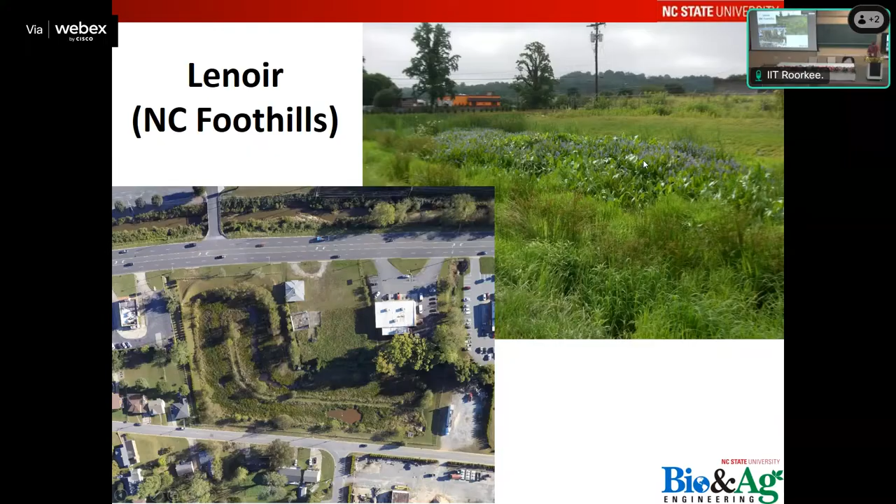Oh, this is a pretty cool picture, taken from the air. You can see this looks like it's a forebay. It's actually not, the forebay is in here, it's already sedimented in. But you can see how the water flows across. There it is up close. That's pretty cool, this is up in our mountains.

It's a small scale wetland, but it works up in the mountains. You may have a spot that makes sense like this, something small. This is a larger one where it's flat, water table's up near the surface.

Oh, this is another pretty cool one. It's got two inlets, this one right here, and there is an inlet that's hidden by this tree, but there's also an inlet here.

And you can see how the water snakes around in the wetland before it leaves. All right, that's a pretty large practice, about 8 hectares of stormwater wetlands, not far, Sean, from your old house.

And this is what it looked like when it was 2 years old. You can see the walkways in here. It's what it looked like 4 years later. Things are growing up, you still see a lot of different types of species in here.

2, 6, okay. Wetlands do go through succession.

How many of you have designed something already in your young careers? You designed something and you've seen it get built. Well, it is one of the very special things. This is my very first project, all right?

So it's very special to me. You see, in 1998, it got installed.

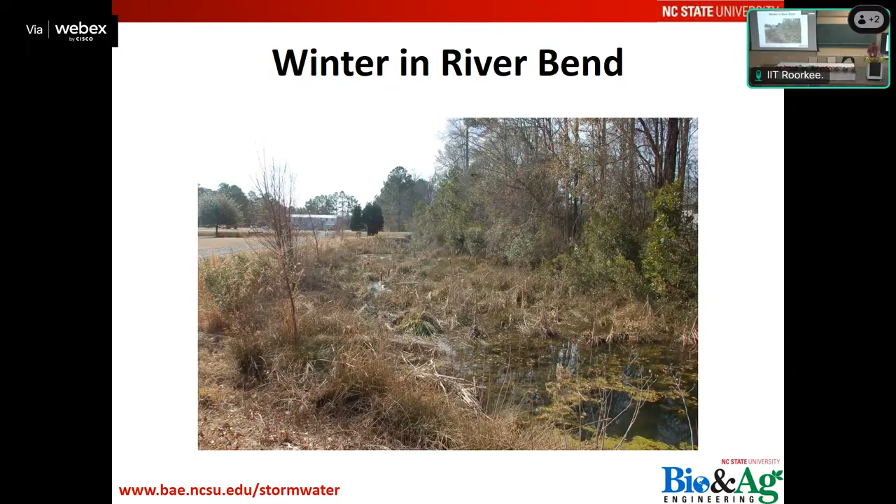Take a look at that one again. Boom, boom.

Here's a step pool system. If you're on a slope, the wetlands are basically wetland cells that cascade down to one another. So if you have a sloped area, you can make constructed wetlands if you wanted.

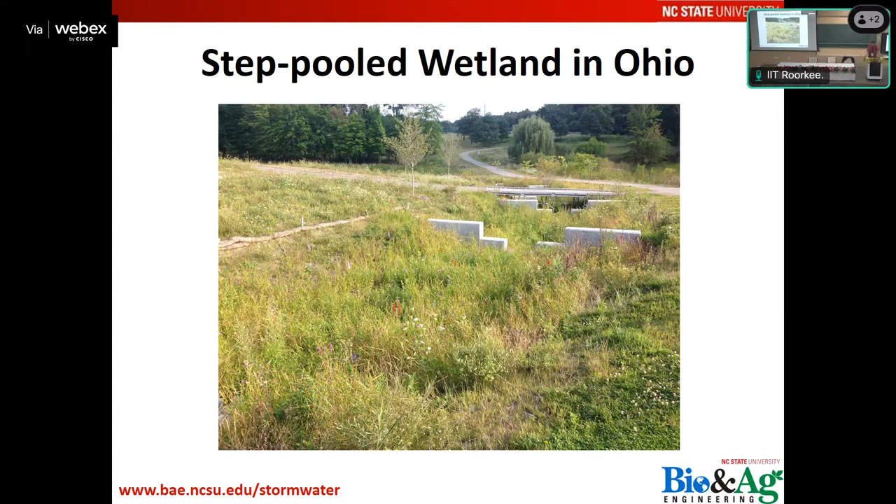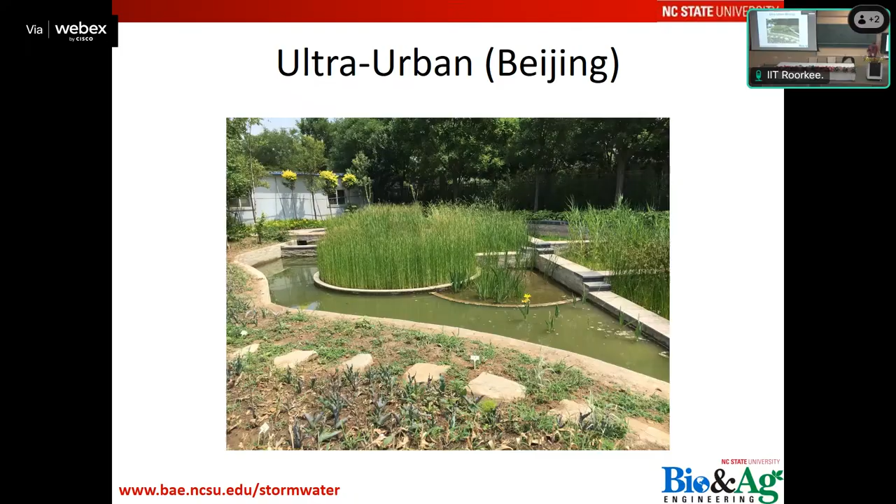All right, here is an ultra urban one in Beijing, where they have certain plant species dedicated to certain geometric features inside the wetland. All right, here's one in Cali.

We talked about the Terminator earlier. When was that? Was that on Monday? We talked about the Terminator. Well, here it is. And what they're doing here is it doesn't rain in California, it's a lot like here.

It doesn't rain for about 8 months, and then for about 4 months it does rain. Except the difference between the 4 months it rains here and the 4 months it rains in California is

that you get a lot more rain here in your 4 months than California gets in its 4 months. Probably about 5 times more. Okay, California is pretty dry, but you still see flow going on.

Where do you think that flow's coming from? Why is there water in this channel when it probably hasn't rained in 4 to 5 months? You guys want to guess?

Yes, there is some discharge, illicit discharge, a little bit of illicit discharge occurring. So there may be some wastewater in that flow. There's two other sources.

You guys ever know that air conditioning produces condensate? If you have an air conditioning device, it produces condensate. Southern California, there's a lot of people. Everybody has air conditioning. All right. So there's actually air conditioning condensate in there. And the American dream, for some reason, involves grass.

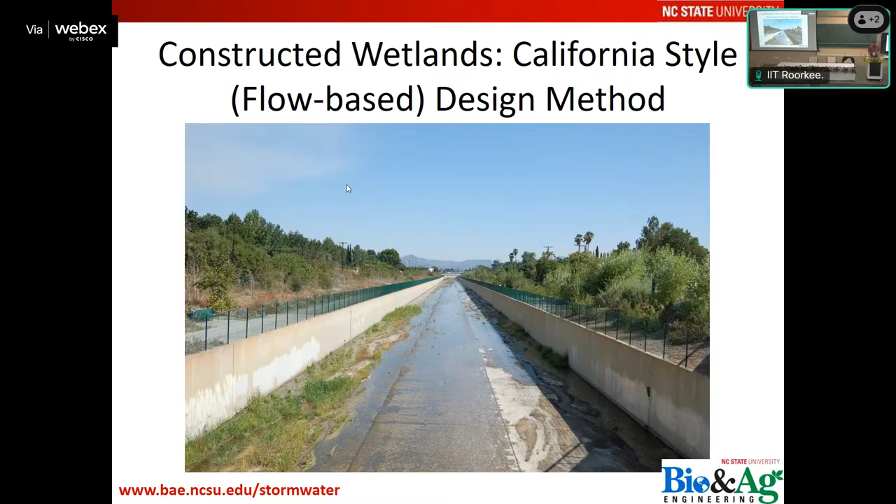But is it a high flow rate? Not particularly, right? And so if you could actually capture this water and send it to a wetland, you could have a significant improvement on pollutant load being discharged, in this case, to the Pacific Ocean. All right? And so what they've done in Los Angeles County is they will divert this low flow water into wetlands. See if I can get it to work. Try again. Into wetlands that are located to the side of the channel. All right. There's the space. And then once they've made the fix, there it is.

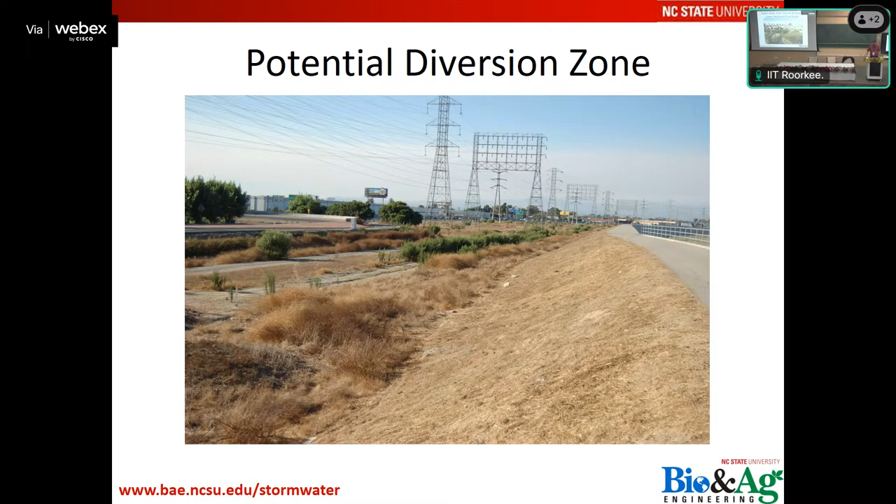So basically they'll divert water from that concrete channel about 1 kilometer upstream. And that's how much fall you have to have. 1 kilometer upstream, and then they'll discharge it here, and then this will flow through a 0.5 kilometer long wetland and get cleaned. All right? So even in places that are semi-arid, or even in times where it's dry, a constructed wetland like this is particularly good at removing pollution.

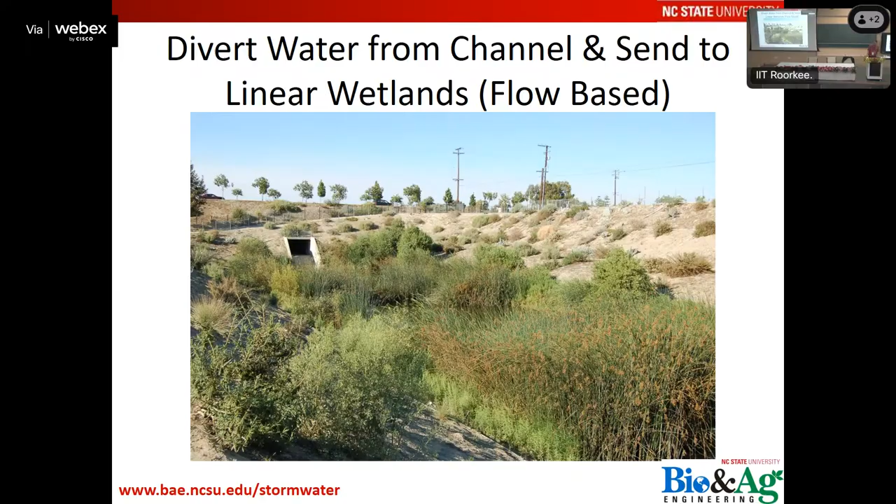Now, I do not know what we're going to see today. All right? But if we see a trickle of water, just remember, a constructed wetland might be very happy with something like that. And we'll discuss in this next lecture, I'll get to it right before we leave today, how to design a wetland based upon flow rate.

We'll come back to why that happens in just a little bit. All right, so where is a good place to put your constructed wetland? Right off the bat, places where the water table is within about 1 meter of the surface. That's a great place to put a constructed wetland, especially when you have enough space and it's flat. Okay? So if the place you're wanting to put your stormwater control measure is flat, and the water table is close to the surface, woo boy, that is Mother Nature telling you that you should be putting a wetland right there, or perhaps a wet pond.

All right? The selection of stormwater control measures is actually not, as we say at home, rocket science. All right? Meaning that, giving homage to rocket scientists, they really should call it rocket engineers because they're the ones that actually build the things. It all is pretty obvious. Like, well, if it's flat, you're near the water table, you're worried about nutrients, and you have enough space, I'm going to put a wetland up. All right. That tends to be how it goes.

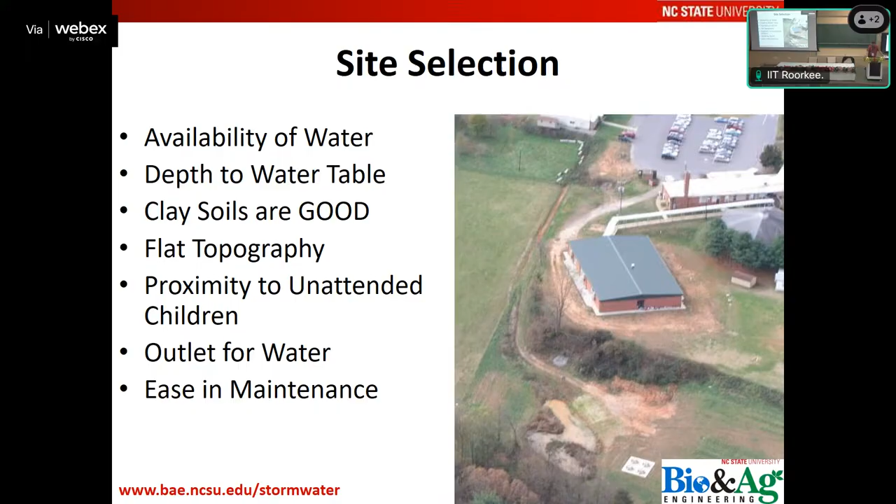So, wetlands, we talked about the pollutant removal mechanisms. This is just a revisit to that very quickly from Tuesday. All right. Wetlands are good at sedimentation, gross filtration, not filtration proper, but gross filtration. They do have adsorption, though the adsorptive sites do eventually fill up. They have plant uptake. They're very good at microbial processes, and you can design wetlands that are particularly good at killing pathogens. You just have to have zones of your wetland dry out.

And so one of the things I mentioned on Tuesday is that if you can identify the pollutants you're concerned about, then I can not only pick a practice that's good at removing those pollutants, but I can adjust the design of my practice so that it's better at removing those pollutants.

So a classic case of if I'm trying to get rid of pathogens is I'll design my wetland to actually be, a lot of the wetland, just a few centimeters above the internal water table, so that in between storms it dries out. It's still a wetland, but it dries out, and therefore pathogens can be killed due to desiccation or drying out. All right. So again, there are things that I can do to my wetland to sort of optimize its pollutant removal performance.

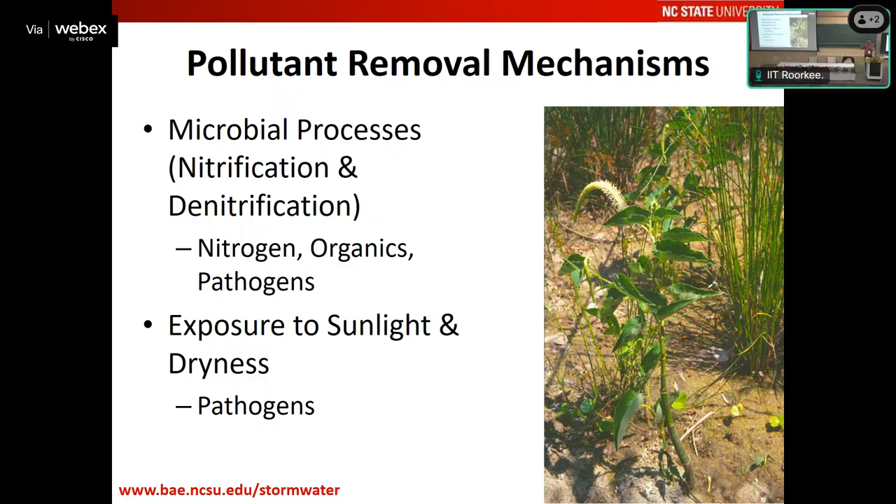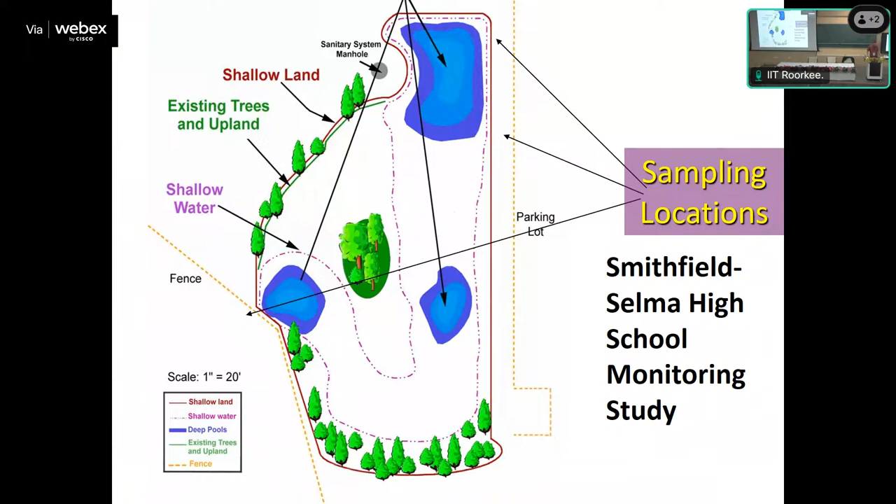All right. So now let's talk briefly about, I'll show you a couple of examples of how well wetlands work. We had a wetland that we studied here, at this school, that's what it looked like where we did the study. So this is the design that the student made. This is what got put in the ground. Not bad. All right. And these are the data. Oh yeah, we collected water from the inlet. We collected water from a chute once we cleaned that up. And we collected water from the outlet structure. All right.

The red bars are your inflow concentrations. And by the way, those are some pretty big numbers. 25 milligrams per liter of nitrogen. That's a big number. That's a big number. There's no other way to put it. All right. And then the blue bars, well, that's what left the wetland.

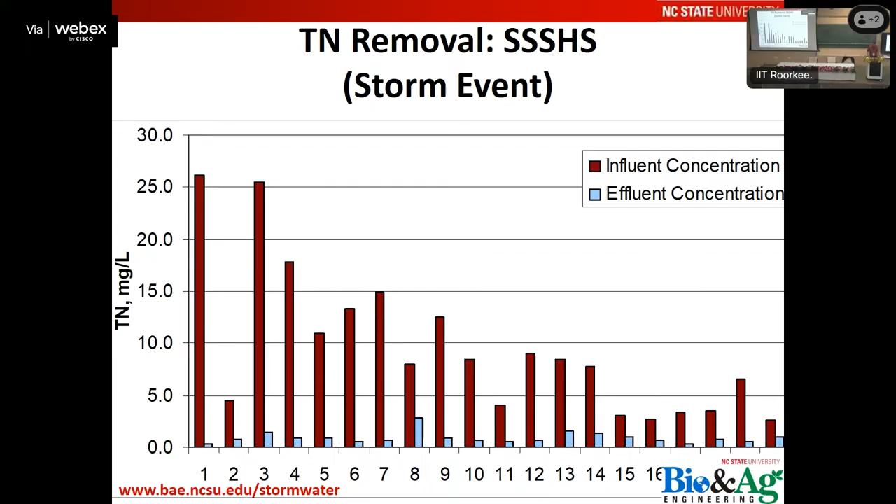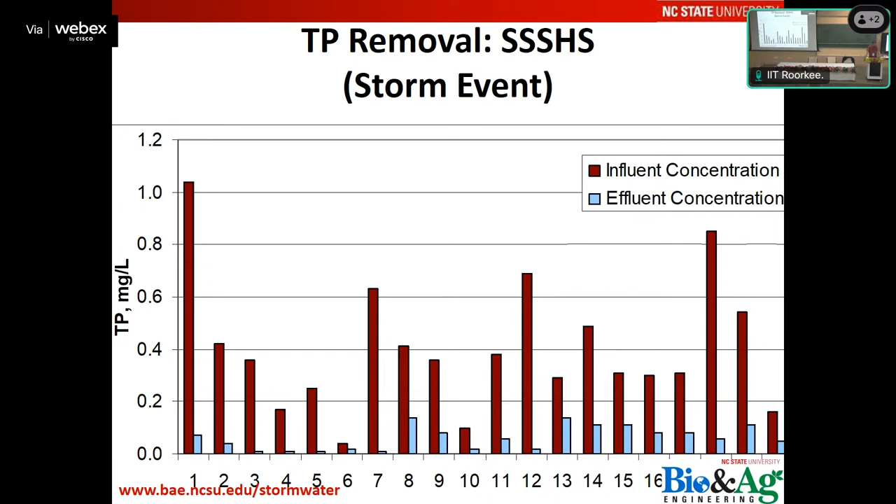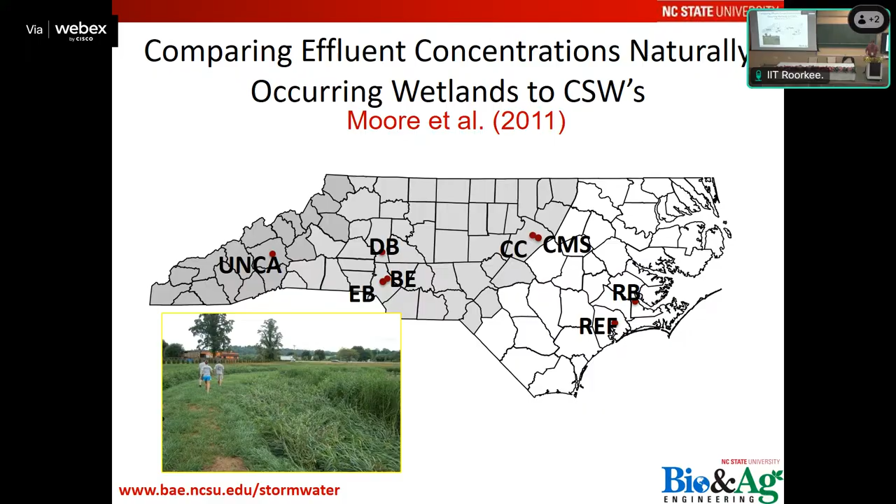All right. And I showed you this on Monday where we compared constructed wetlands to naturally occurring wetlands. And just to remind you that the constructed wetlands worked similarly to the naturally occurring wetland. Not exactly the same, but similarly, except for one. You guys see the one I'm talking about? One of those 7 man-made wetlands or anthropogenic wetlands. Which one was it? The red triangle one? Yeah, it's the red triangle one. Exactly. So you got the red triangle one, like, hey, Bill Hunt, what's up with the wetland represented by the red triangle? Some of you are wondering that.

How many of you guys are pessimists? Any pessimists in the room? How many of you are optimists? Yeah, I'm an optimist too. Engineers, they say, well, I'm a realist. That's fine. You can be a realist. You guys know the difference between the optimist, the pessimist, and the engineer? The optimist, the glass is half full, right? The pessimist, the glass is half empty. The engineer, the glass is twice as big as it needs to be. All right, fine. You can use that joke. I did make it up. I made it right there on the spot. No kidding. I'm sure someone else has made that joke up, but okay. I have to remember that joke for later.

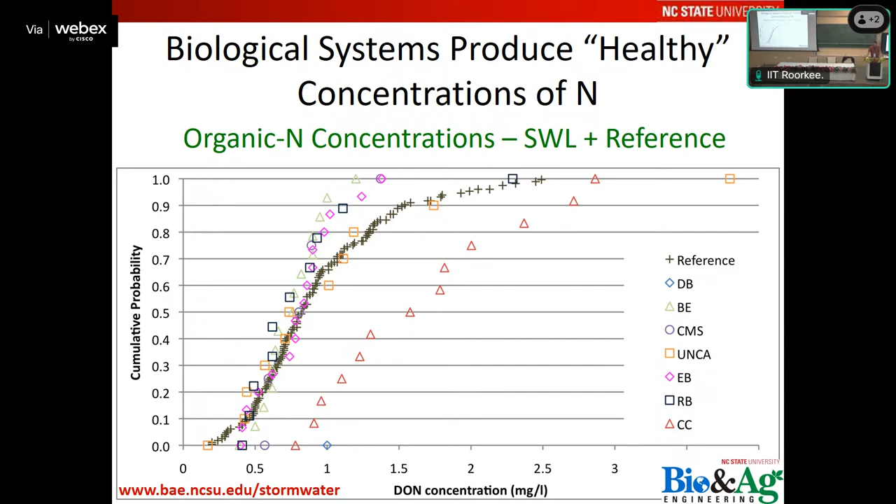And this is something I learned from my agricultural engineering degree that honestly I did not learn from my civil engineering degree. I got my graduate degrees in ag engineering after getting my bachelor's in civil water resources engineering. Y'all see this soil right here? Would you guess that soil is fertile or sterile? Sterile. That's right.

One of the things in ag engineering is they teach you how to grow plants, crops, maize, for example, wheat, soybeans. And you learn about soil fertility as a part of that discipline. In civil engineering, I learned about soils. You know what I learned about soils? I learned how to beat the crap out of them to make them strong enough so you could put a pier for a bridge on it, right? And so there's two different ways of looking at soils. The CE way is so I can build structures on it. The ag engineering way is so that I can grow stuff in it.

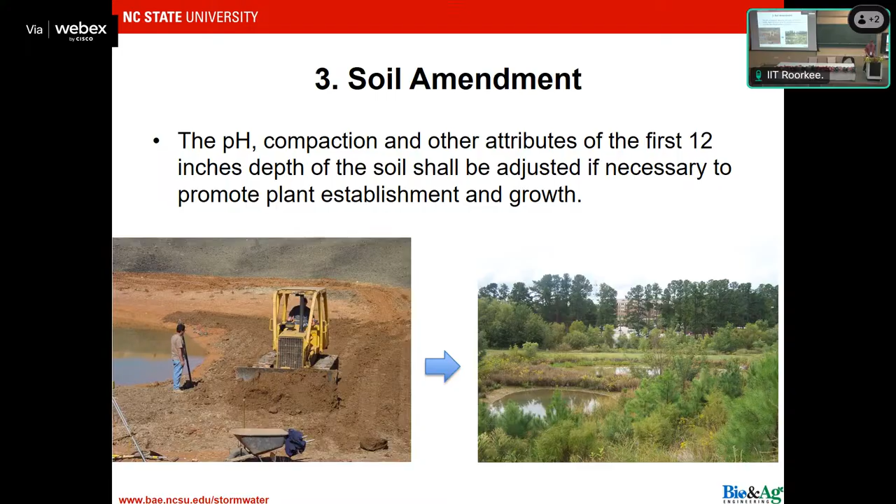And so with a constructed wetland, it's important to amend the soil with something to help promote growth. We have standards, darn it. Don't worry about the 12 inches and all that jazz. Just make sure you amend the soil of the wetland with something organic to promote growth.

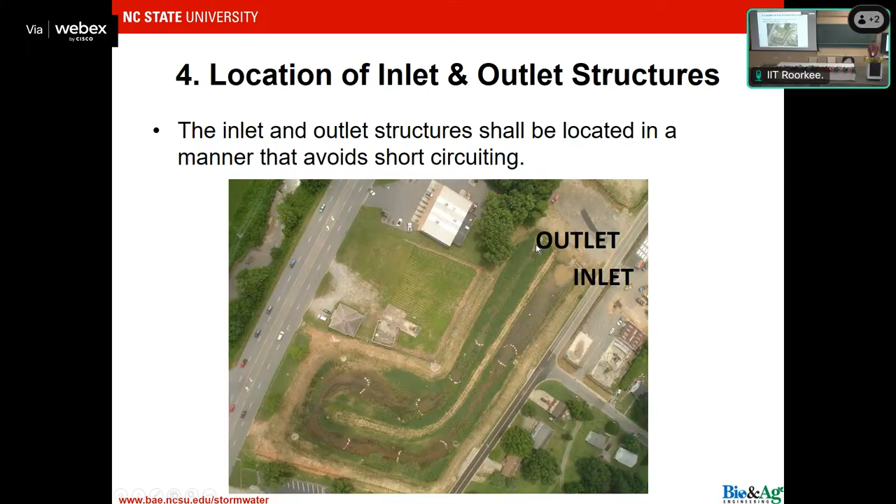Here's a classic case. So I'm just going to move on and hit a couple of things here. Here's an inlet. Here's an outlet. They're right next to each other. Like, ooh, that's a problem. But the reality is the water flows all around this berm before it leaves. So the inlet and outlet are actually extremely far apart. I will show you this wetland a little bit later because we've monitored it, all right? And there's an example of that berm.

Remember I talked about forebays? What do forebays do? Two things. You got them right the first time. I just want to because I'm going to ask you this question tomorrow. This question is going to be on the test without question. Name one thing a forebay does. Okay, I think you got both. It slows the water down and it traps coarse sediment. Slows the water down, takes the velocity, takes energy out, traps coarse sediment. That's what forebays do. You need to have a forebay in a wetland, right?

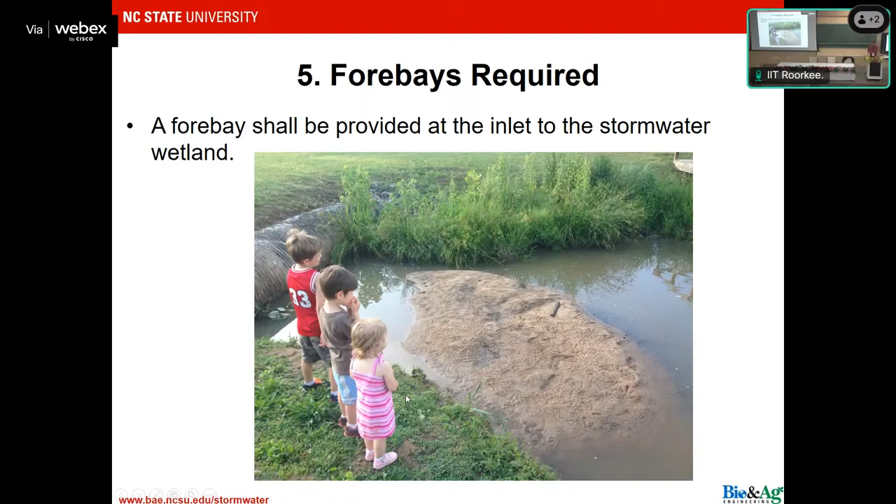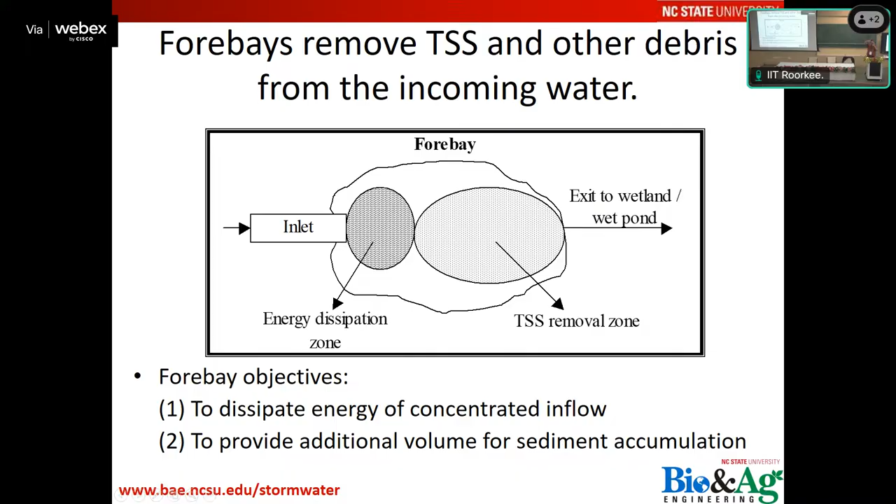And there's future stormwater control measure inspectors right here figuring out what's going on. All right. So here's your energy dissipation zone. Here's your removal zone. So the forebay of the wetland has a part where the energy gets taken out, and then a part where the deposition happens. And it's roughly 15% of the surface area. It says 10 to 15, but we want it typically to be about 15% of the surface area. That's what we found is about the right size in North America, okay?

Based upon our coarse sediment loading and based upon a frequency that we are comfortable with scooping out the sediment. Property owners are okay scooping things out every 5 to 10 years. You may be okay scooping them out every 2 to 5 years. Just be mindful of that. And plus, there does come a point where you can't make the forebay any bigger because you've got to get access to it.

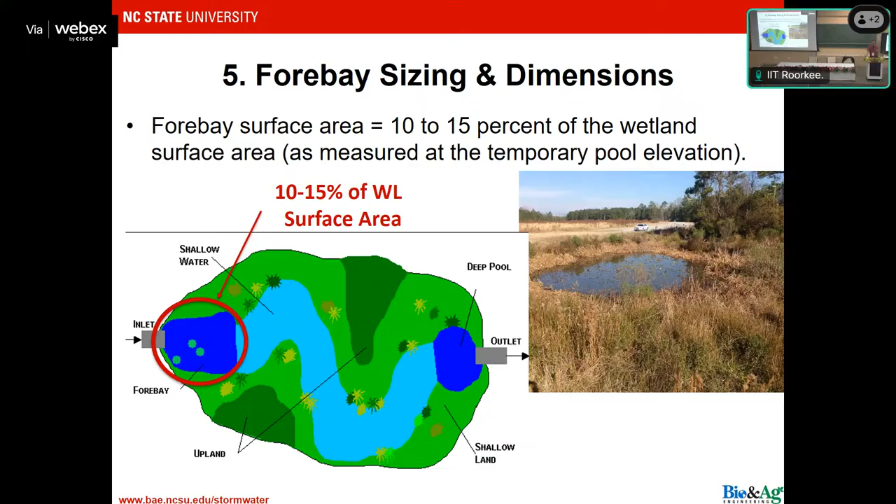I just think if you use a forebay for a wetland or a wet pond in India, based upon what I've seen on my two visits to the country, you're going to have a higher sediment load coming in, which means you'll have to clean it out more frequently. The general idea behind a forebay is it's deeper where water comes in and tapers up to a shallower area. That helps facilitate energy removal and sediment deposition.

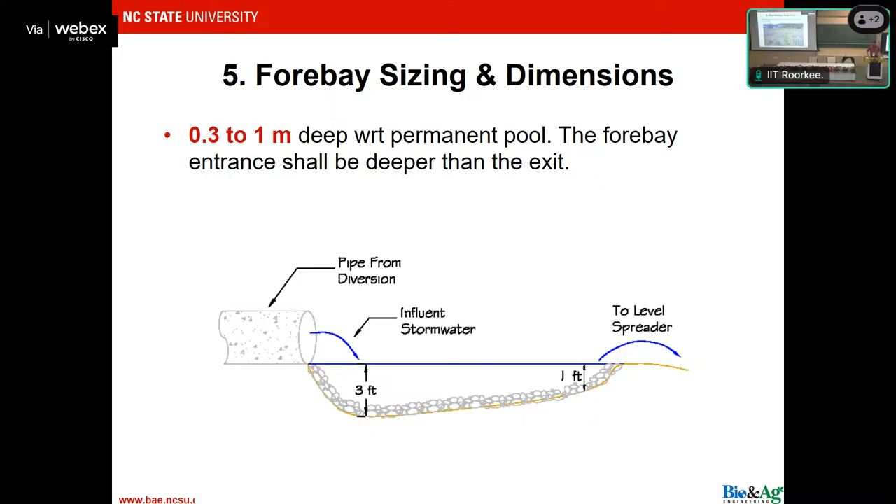Wetlands also have to have areas inside them, besides the forebay, where the water is a little bit deeper. Not a lot deeper—I'll skip the reasoning why due to time, but basically these little pools should be about a half a meter deep. Why do you need pools scattered about a wetland that are a half a meter deep?

What if I told you that critters live in there, insects? What type of insects do you want living in deep pools in the middle of a constructed wetland?

How many of you want mosquitoes living in that? There you go, okay good, we're on board with that. We don't want mosquitoes. So what type of critters do we want in there?

Critters that eat mosquitoes—that's correct. There's also a little fish here, in Asia, that we have in North America too. It's called gambusia. Have you ever heard of gambusia? It's called a mosquito fish because guess what it likes to eat? Mosquitoes. So by putting those deep pools in there, you're giving space for gambusia and other things, insects notably, that like to eat mosquitoes. You're giving them a place to live.

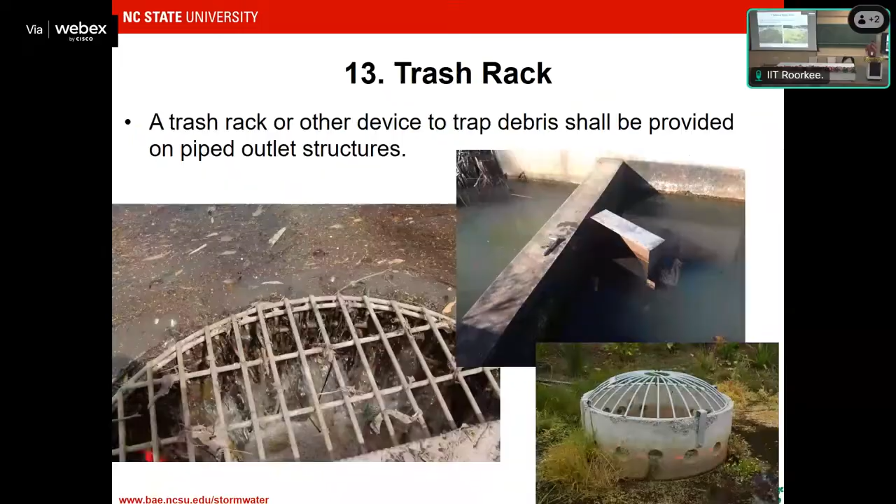I'm going to skip through a couple things. I already told you it was a half a meter deep. All right, trash racks, same story.

There are parts of the wetland—most of the wetland, if you're designing it to remove nitrogen, which is usually our reason to use wetlands—that are about ankle deep water. We call that, very fancy name, the shallow water zone. Does that make sense? What is that?

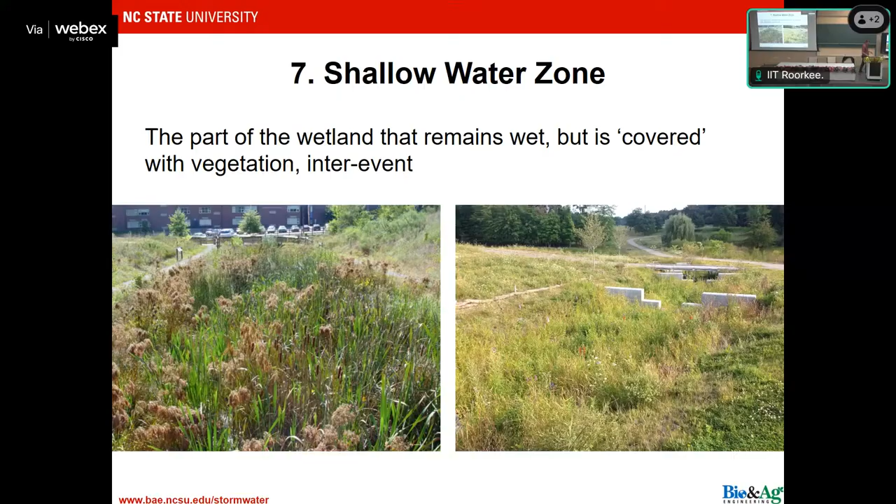About 10 centimeters? The majority of the wetland is 10-ish centimeters deep because that's where the plants you see can grow. They're happy there. And it's in that zone that denitrification is occurring, so that's an important zone in a wetland. Its maximum depth would be 15 centimeters, but its average depth is somewhere between 5 and 10 centimeters.

This is a bit of a challenge with wetlands because you want to make sure you get those depths right. You don't want those depths to be high and dry. So if your orifice elevation is off 5 centimeters too low, a chunk of this is going to be dry and it's not going to do its job of reducing nitrogen. And if your orifice depth is 5 centimeters too high, it's going to be too deep, and you might even struggle with plant growth towards the edge of it.

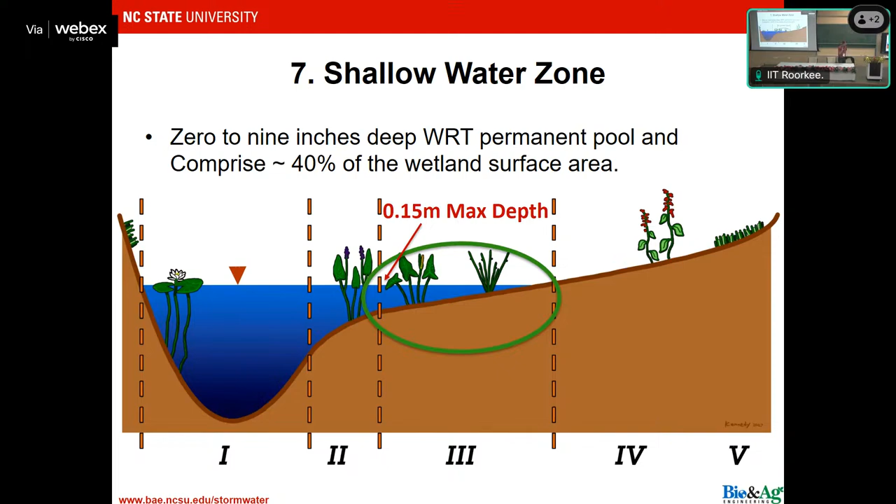Why don't we have this for a pond? Because it really doesn't matter for a pond - you're off by 5 centimeters in a pond, whoop-de-doo. But in the wetland, the grades matter so much for plant growth that you want to be able to get within 5 centimeters, usually 2 or 3 centimeters, of what was planned. I just want to make sure everyone is comfortable with that - it's an important point about constructed wetlands.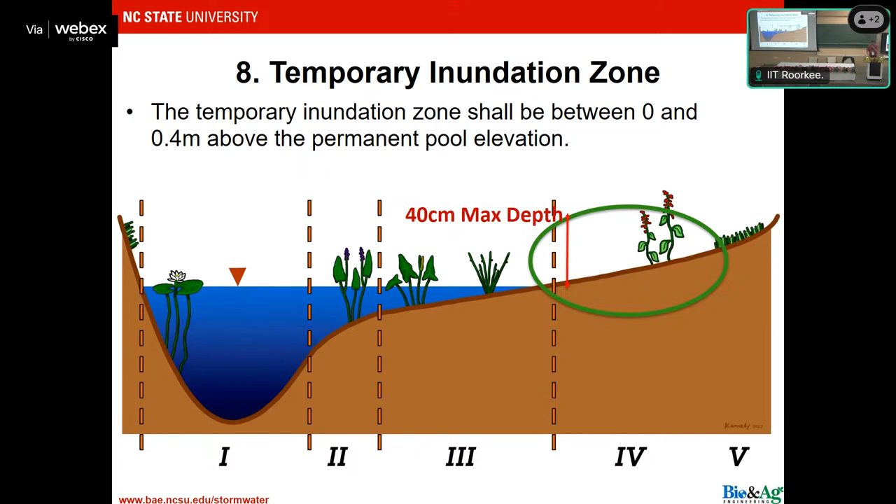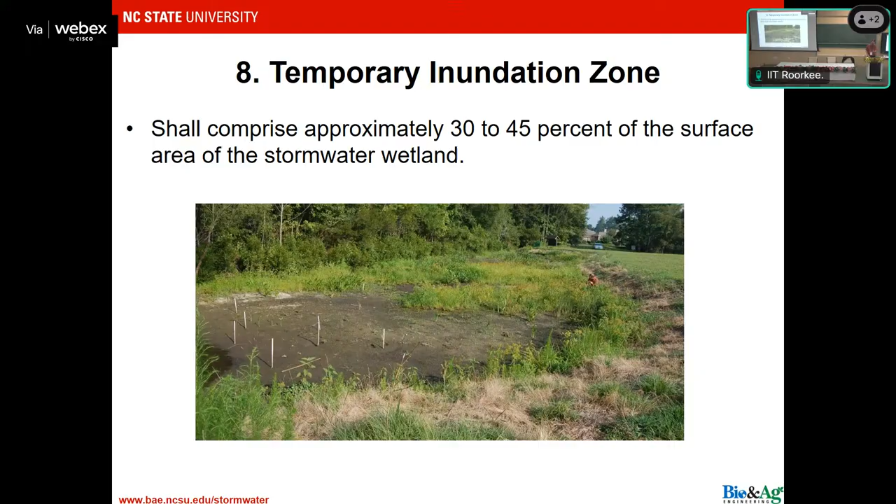Temporary inundation zone - this is where you want your wetland to dry out so you can kill pathogens. If you're worried about pathogens, you're going to have this be a larger fraction, a larger portion of your wetland. If you're not worried much about pathogens, they're going to have it be a smaller fraction of your wetland.

So the shallow water zone, oh yeah, I actually went through that. Oh, you know what, I was going backwards. What's happening, Bill Hunt?

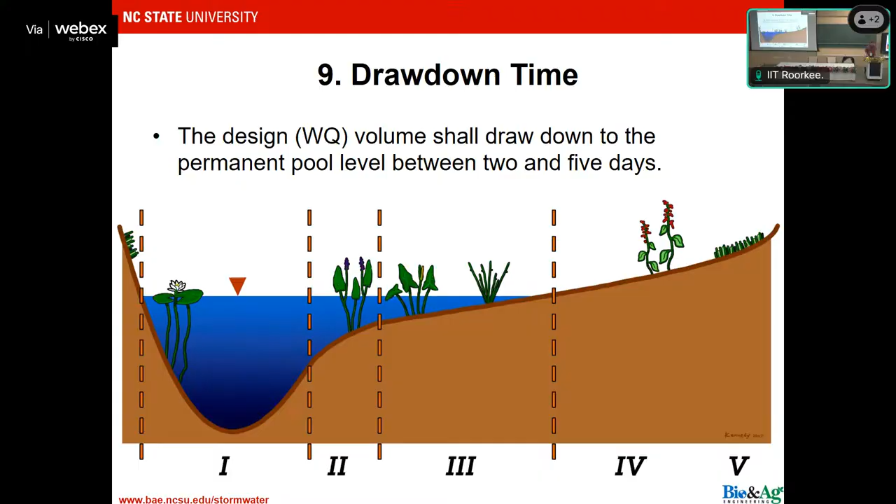Drawdown time, 2 to 5 days. You know why we have it. There it is, 2 to 5 days. I'm going to skip through that. And there we go, here's your outlet structure. I'm going to go through this pretty quickly because there's a couple other things I want to share with you.

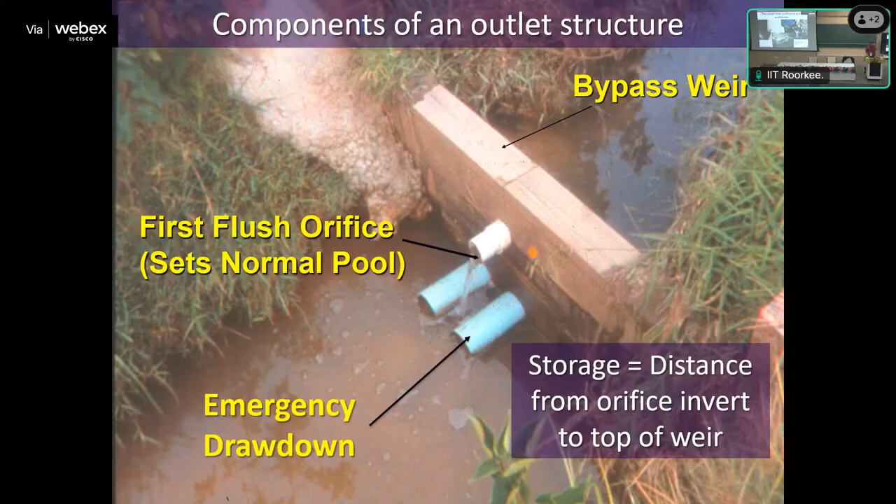Water is released from wetlands through orifices. I'm pretty convinced that whoever the designer of this wetland was, was getting paid by the orifice. If you can ever make that gig happen for you, go for it.

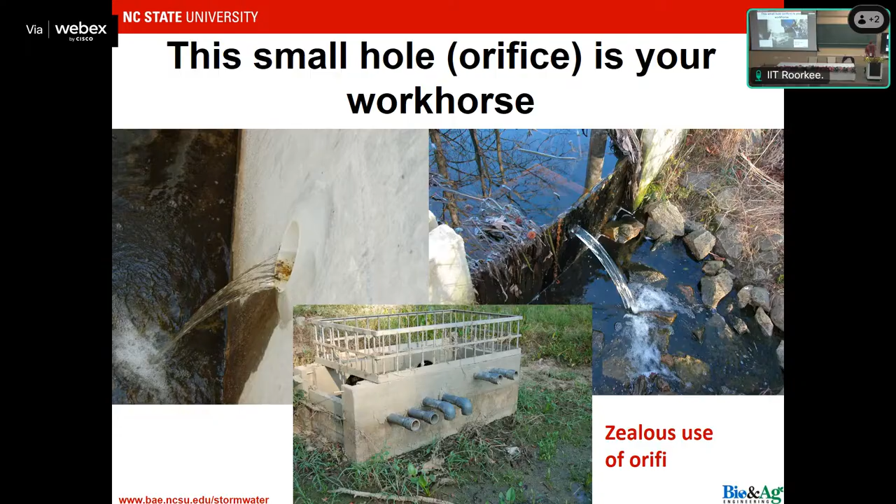What's a reason to pull water from lower in the water column? See, the intake for that low flow orifice is sunk, let's say about 15 centimeters into the water column. You see it pretty clearly here. Why would you do that? Because we do it a lot.

What do you think the biggest problem is with a wetland that has an orifice this big? Say it real loud. Clogging. That is the biggest problem. So if you put your intake 15 centimeters down, guess what you're limiting? Clogging. Anything that's floating isn't going to get access to that low hole. So that's the reason people do it.

You also can release cooler water, but that's not the main reason. I realized the answer was sitting there on the screen the whole time, but I know you knew it. If you read it, power to you, that's good enough. I'm going to get rid of this thing. I don't think it wants to get rid of.

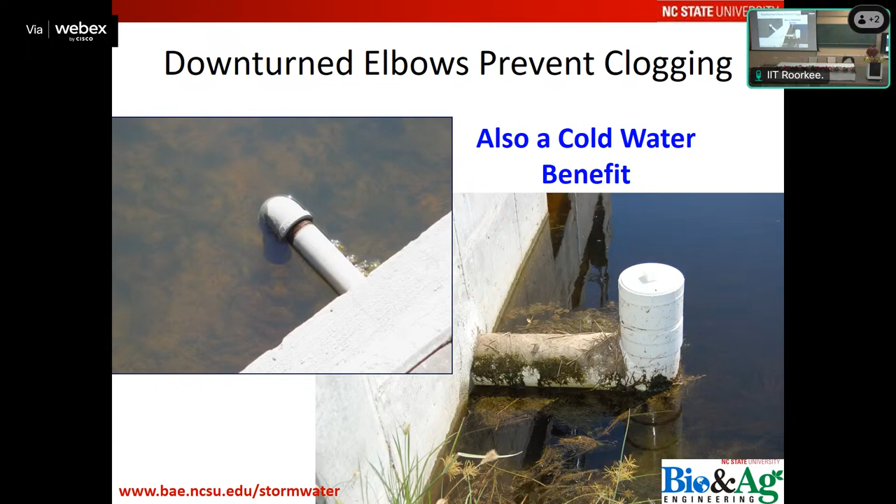Not to get into all the details here, but how often do I let engineers make the decision on landscaping a wetland? Hardly ever. Do you know why? You guys don't be hurt by this, because we're not good at it. That's not what we're trained to do. Engineers are really good about taking a basin and routing storms through it, we're really good at that. We're good at developing topographic layouts, but man, plants are not our gig.

But the good news is there are professionals out there that know a lot about plants. Now, I will sometimes do it if it's a small project that doesn't have a lot of public contact. But most of the time, I'm going to get professionals to help me with plant layout. So just know that there's guidance associated with that.

In that guidance, one of the most important things that we share with the plant people is to not purposefully put typha in there. Now, I know you've got typha because the world has typha. Why do you think I'd be like, I don't want any of that? What is it that, why would I not like typha?

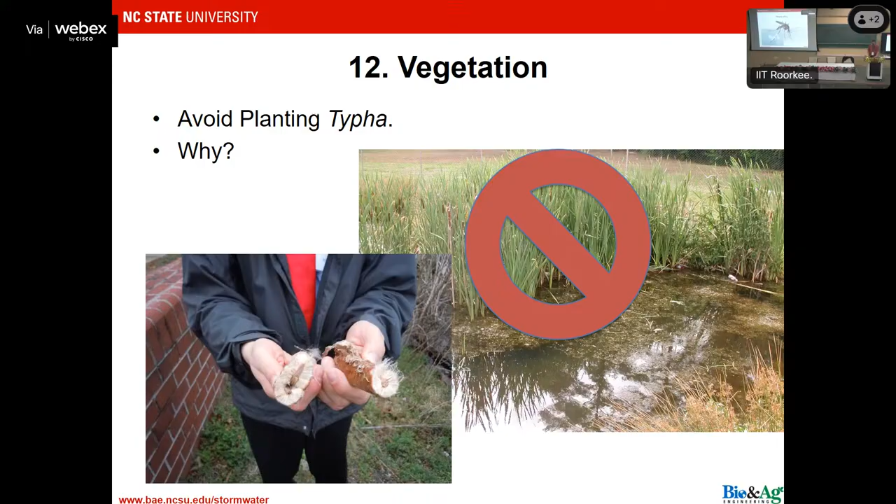And once typha takes over, guess who is protected? Guess what's harder to be eaten? That's right. So we are very careful not to put typha in.

And when we talk about maintenance, we spend a lot of time on it. The first year to 2 years of a constructed wetland, we go in and clear out the typha. As it shows up, we clear it out and give the plants we want to survive the best chance. I have found that in North Carolina, you need to do that for 2 years. After that, your plants are so well developed, they have such a strong presence that we don't have to worry about the typha. I would still look for it, but we don't have to really worry about it, which is pretty nice.

Now what I want to do is talk briefly about how you figure out the surface area of a constructed wetland. There are 2 ways of determining your surface area. One is what I refer to as catch and release. It is a volume-based design. I'll explain it up here on the board.

Got that taken care of. I'm going to move this down a little bit, a little bit easier for me. I just love having a chalkboard, man. You might think I'm about to draw a leaf, but guess what? What did I just draw right here? A catchment. Right, so here's your catchment.

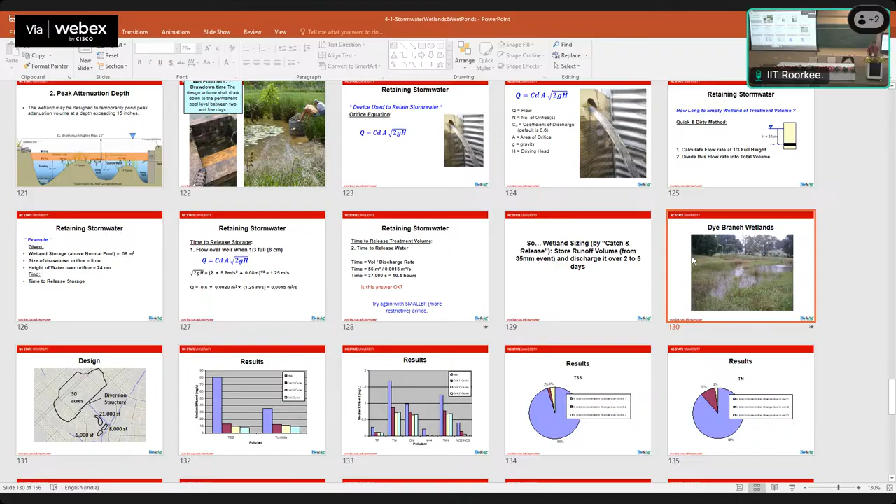Now, I just went through on the board what my slides go through, but I'm going to skip some of the slides because I think it was better for me to teach that off the board. But I do want to talk about some other very interesting thing that we learned.

So I want you to see where wetland design is going. I'm going to show you data from 2 or 3 wetlands, okay? I've already showed you some data—I'm going to come back and show you some more. We did a study here, and we had a catchment. And in this catchment, we ended up having a wetland that had actually 3 different cells, okay?

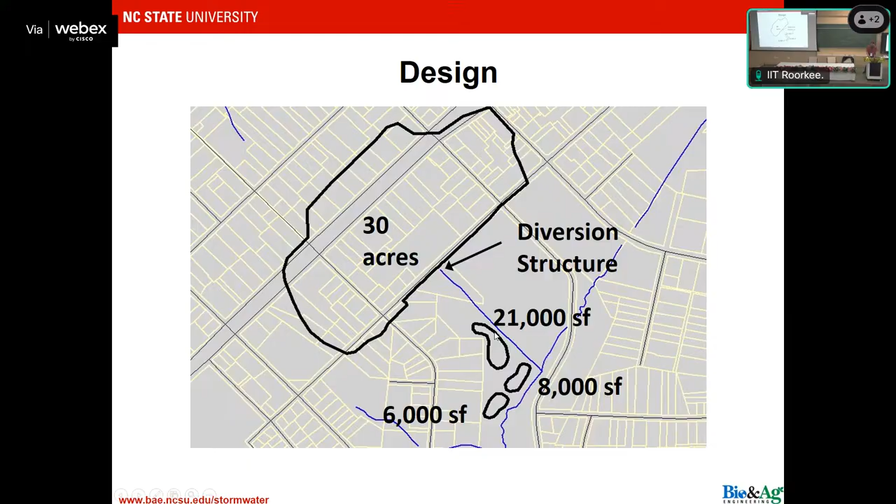Cell 1, and that was cell 1 and cell 2. All right, there were 3 different cells. I know it's imperial units, but the majority was in the first cell. The second 2 cells, when added, were about 40% of the total surface area—so they weren't insignificant. The water came off the catchment, got diverted to these cells, and flowed from cell 1 to cell 2 to cell 3 and then out.

Now I want y'all to look at this and tell me, what do you see? Here's the water in. This is the water that leaves cell 1, the water that leaves cell 2, and the water that leaves cell 3. That's for TSS—you can see turbidity. What do you see here? What do you see?

Let's put our feet back into the developer's shoes. Okay, the developer—what's the developer interested in doing? Complying, but doing so in a cost-efficient manner. Okay, that's how developers roll: I'll comply, but what's the most cost-effective way for me to do so?

If the developer looks at these data, what do you think she thinks? Is she like, boy, I'm glad I have 3 cells of a wetland? How many think, oh yeah, I'm thrilled I got 3 cells? Okay. Or do you think the developer's like, I could have 1 cell and do a pretty good job? You know what the developer is going to say? The latter—she's going to say, I could have 1 cell and I could have saved me a lot of money.

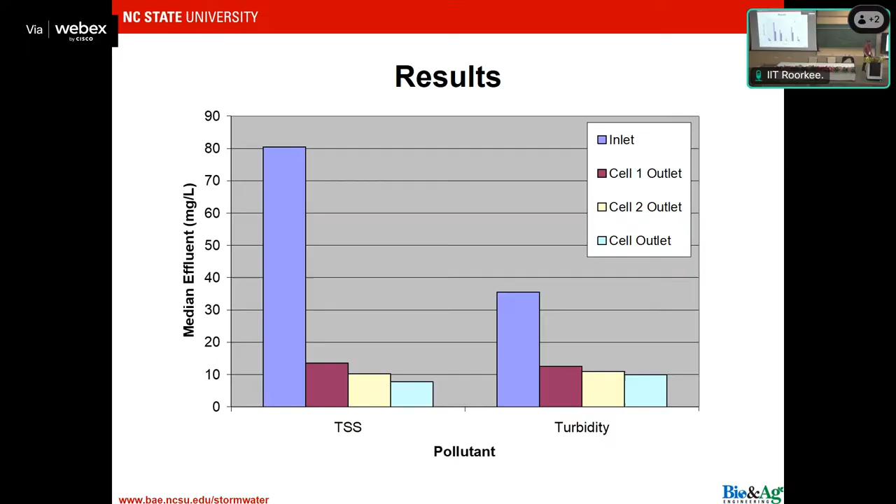All right, you say, well, okay, but that's for sediment, that's for turbidity. It also held true for the record for phosphorus. It did not hold quite as true for nitrogen—there was some additional benefit of the second cell—but even then, the vast majority of the improvement occurred in the first cell. So,

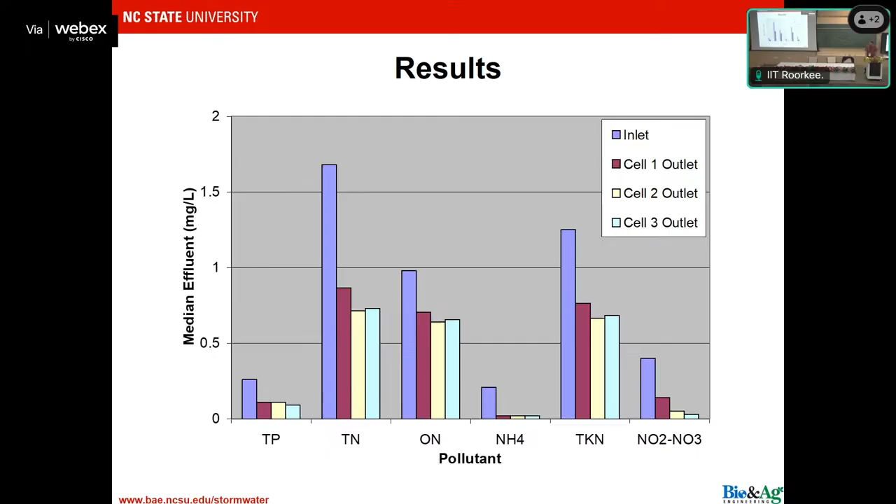what this study says is that, hey, maybe our wetland design—remember I told you the wetland design is conservative? Okay? Maybe it's too conservative. All right, well, there's other ways of looking at those data.

We did another study. This one was a very big wetland—the wetland itself was 11 hectares. The watershed was about 400 hectares, so a very big watershed. All right.

350 to 400 hectares.

Water got pumped into this wetland, and the water flowed through here and around. The water also got pumped through here and around. And we monitored where the water came in, and then when the water left this first point, the water left this second point, and then as it left, total.

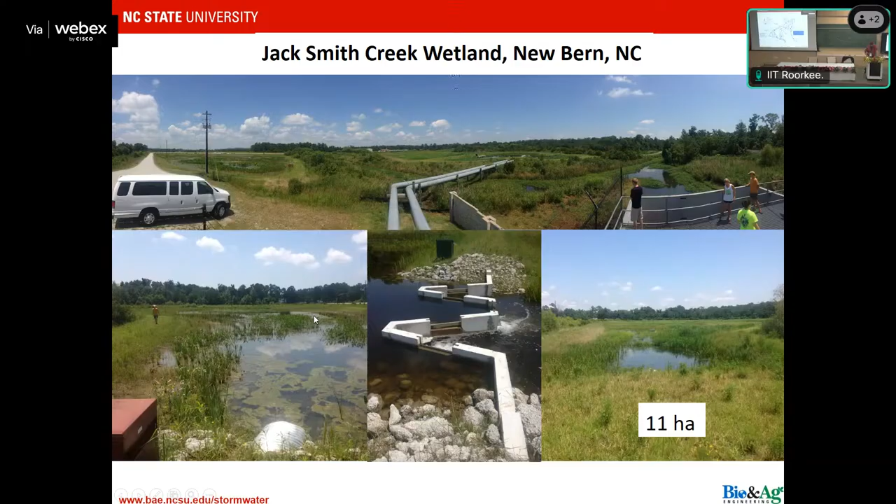This is the water coming into the wetland. This is the water as it left here, and here's the water as it left here. And what do you see? By the time you got to the end of the first cell, all the improvement had occurred.

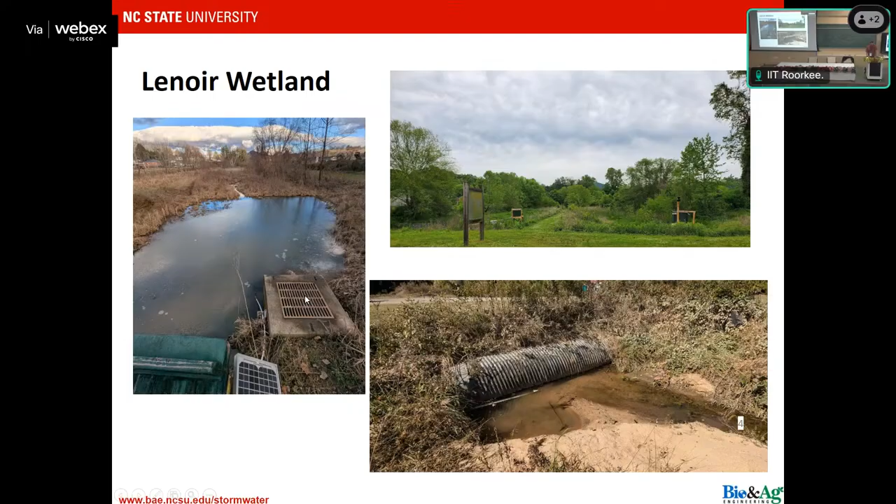That's the same kind of thing that we just saw. And guess what? We might as well go one more time. Here's my wetland in Lenoir. Water flows in. We had an inlet collection, pass number 1, pass number 2. Then there's the flow. We got it at the back.

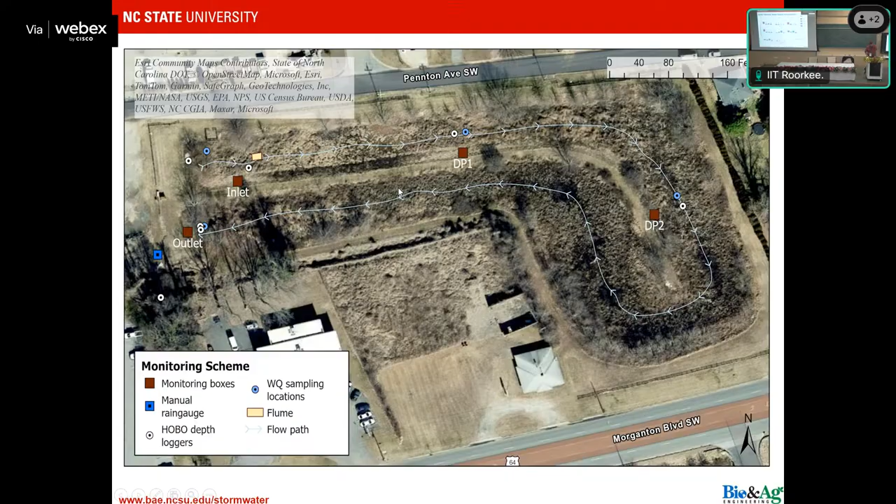And guess what happened again? By the time you got to the first monitoring station, this one, almost all the improvement had occurred, for most of the pollutants. There's a couple of exceptions, but most of the pollutants. What does that tell you?

This is 3 different wetlands. And by the way, it's hard to monitor. It costs money to monitor these things. So I've got 3 examples where I show the exact same thing.

All of these wetlands, if you're worried about pollutant removal—now it's different if you're trying to mitigate flows, okay—but if your concern is pollutant removal, all 3 wetlands were too big, at least if you're paying for it. I guess if you're trying to get the lowest number you can, they weren't too big. But for those people that are paying for it, you're like, can I just have it be 40% as big?

Well, the reason this is the case is that this particular wetland, and by the way, 36 storm events is not nothing. That's a lot of events.

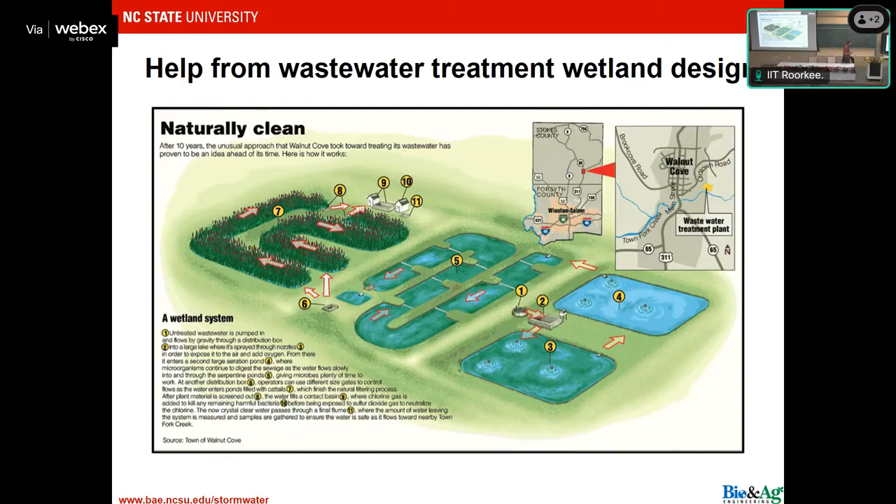These systems were flow-based, all right? If you go into the wastewater world, and I mean y'all are treating wastewater here and then using it on the grounds for fertigation. In the wastewater world, there is a wholly different design methodology, and it's based on flow rate. So when they build a wastewater wetland, they base it on flow rate, okay?

And the idea is that with certain types of wetlands, you could base them on flow rate too. Certainly an offline system like this, and I'll show you an example of one that we're actually pumping in in just a little bit. It's offline, or it's next to a creek, and the pump comes on and pumps water into the wetland, and the wetland water flows to the wetland for treatment. Totally different way of designing, and it's actually very similar to what I talked about in Los Angeles, where they're diverting that low flow into this long treatment wetland that runs parallel to the canal.

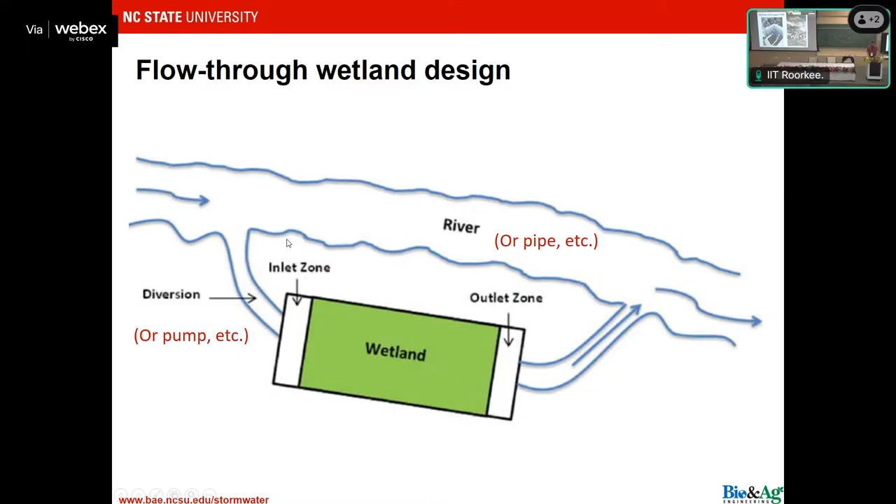Or, as I said before, let me go back here. You could put—in this case the water is diverted in—but what if you have no diversion? You have a pump housing, and then you turn your pump on. Let's see if the video goes. Yep, you turn your pump on, the water's leaving this creek here, the pump comes on, and it's spilling the water into the wetland for treatment.

You guys hear me? I just got excited apparently and screamed it off. Or it's batteries for this, but I'm okay for a little bit. So if there's a new battery, that'd be great. Oh wait, I know what I can do. Oh, I can do that. Whoa, that's loud. Holy crow. Okay.

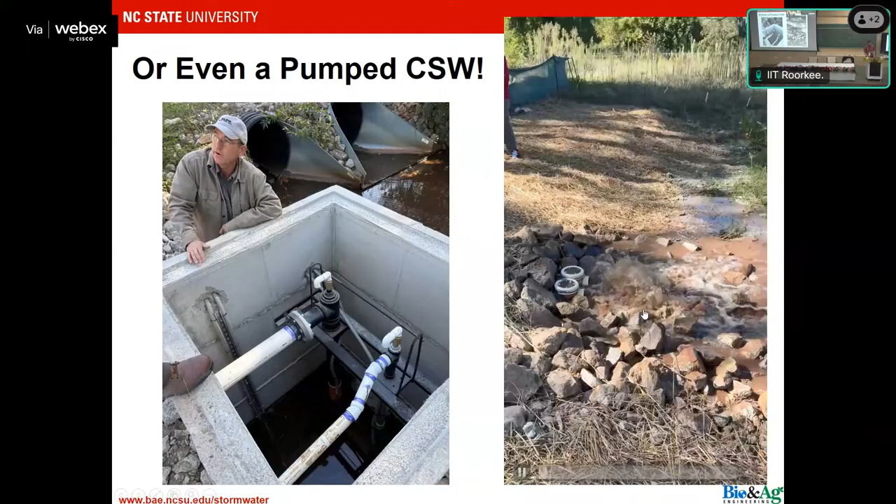So how are flow-based wetlands designed? Well, they basically follow a first order decay. So the longer you keep your water in your wetland, the more it approaches a standard effluent concentration, like there's a benchmark you're going to hit.

And so the C star is very important because it basically says that you're not going to get, like for nitrogen is a good example, can you realistically expect to release 0 milligrams per liter of nitrogen from a natural system? No, because nitrogen is a nutrient that is found in nature. Remember those 3 N's, all right? And so wetlands discharge nitrogen, that's just normal, all right? And there's background nitrogen. And if you can have the most pristine stream coming out of the Himalayas, all right, it's going to have nitrogen in it. There's no problem. It's fine.

And so a first order decay essentially says... thank you for doing that. Oh yeah, great. So thanks a million. Perfect.

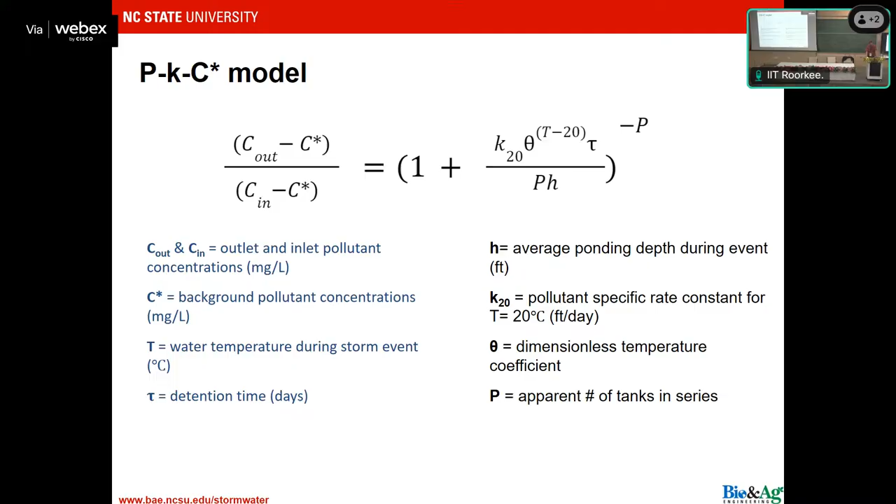And so in the end, what we're actually trying to figure out is how long do we need to keep our water in the constructed wetland? Or in other words, at what flow rate are we allowing the water to be in the wetland for a sufficiently long detention time so that we hit target effluent concentrations? That's an entirely other way to design and construct a stormwater wetland. And it takes advantage of the fact that our wetlands are probably bigger than they need to be to deliver the good, which is a good thing for you if you're trying to retrofit a wetland in.

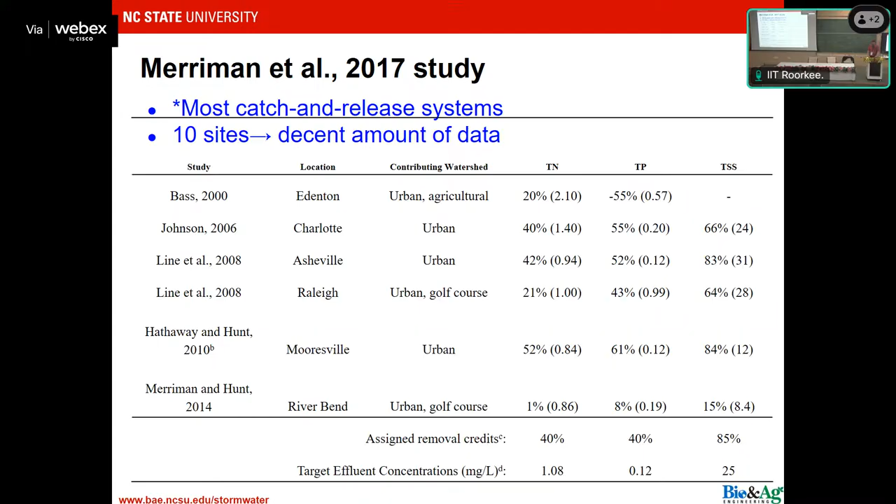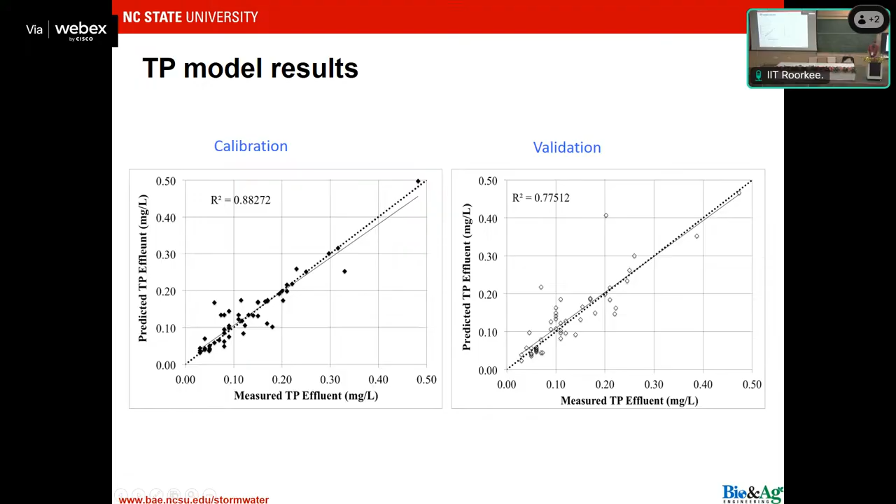All right. So what we ended up doing is we had a bunch of data we collected over the course of North Carolina, and we basically ran this first order decay equation, and you can see for TSS, that's good data, 0.91 R squared, even the validation 0.744 is not bad. Phosphorus 0.88 during calibration, validation 0.78, not bad. And curiously, in the nitrogen model, the validation exceeded the calibration. So is it perfect? No. Is it pretty good? Yeah, it's pretty good. If you're flirting with your validation numbers all around 0.8, you're like, yeah, that's pretty good.

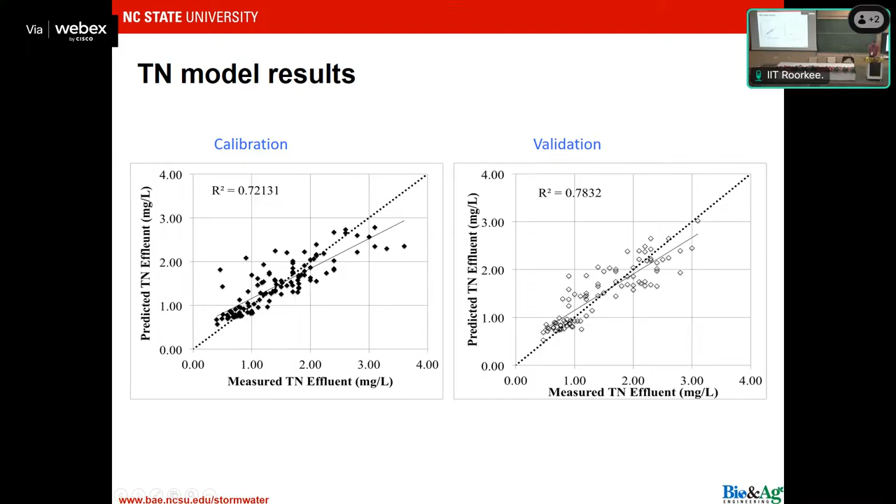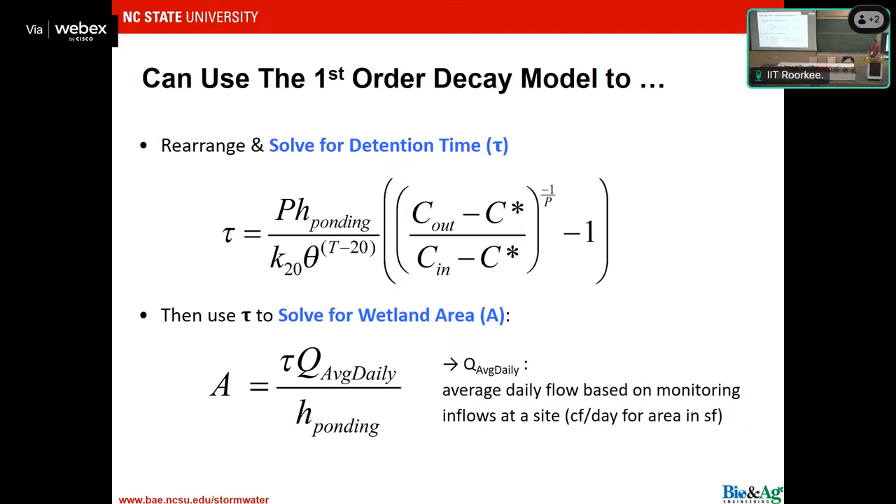So then what we did is we took that information and we basically reset that equation for our North Carolina experience to either solve for detention time or solve for wetland area. All right. Again, I'll print this out and share with you, but there is a third talk I need to give today, so I want to cut to it in a second.